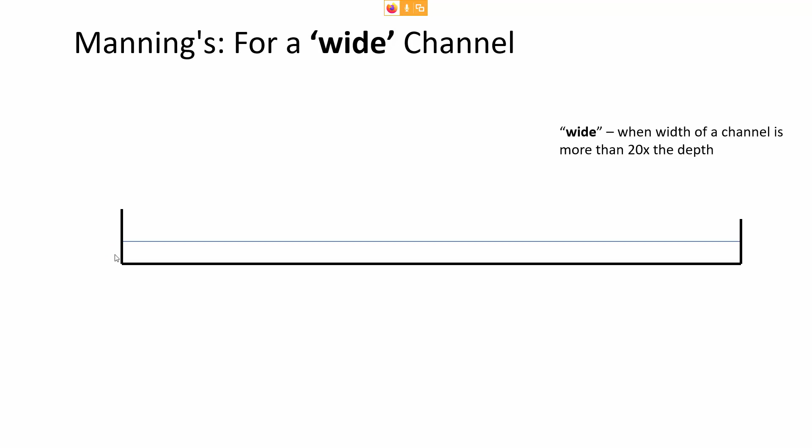What that allows us to do is, when there is a really wide channel, what's happening on the edges isn't quite so important. So for instance, if we had a trapezoidal side, and it's really wide like we're seeing here, the fact that it had just a little bit of extra flow on the sides of the trapezoid would be less important than if the channel wasn't wide. And so how that affects Manning's equation is that we can express it in terms of the flow per unit width.

Remember, lowercase q is the flow that's occurring divided by the width of the channel B. So it's really simple to find the flow depth using Manning's equation if you have a wide channel. It's just the flow per unit width times the roughness divided by the channel slope to the 1/2 power, and then all of that to the 3/5 power.

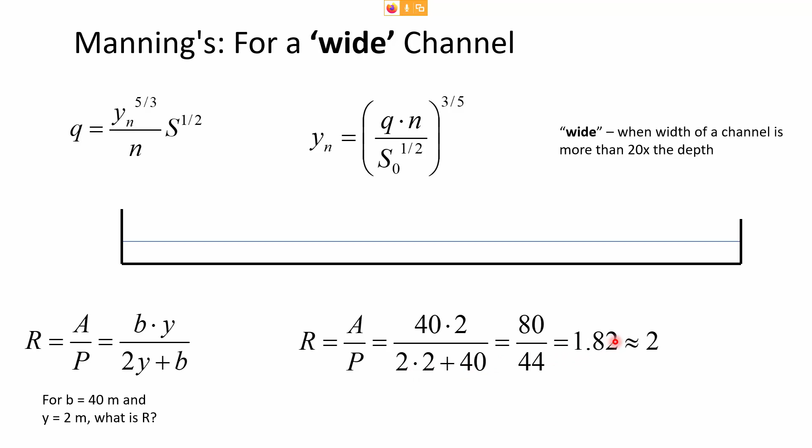So just as an illustration of why this is valid, let's say, for example, that we had some channel that was 40 meters wide and the depth was 2 meters. If you calculate the hydraulic radius for a channel that has a width of 40 meters and a depth of 2 meters, using the area and the wetted perimeter, you'd see that it comes out to about 1.82.

That's relatively close to 2, which is significant because what we're assuming in this wide channel simplification is that the hydraulic radius and the flow depth are approximately equal. Now, that's why we set the limit at it has to be at least 20 times wider than the depth, because when you get narrower than that ratio, it becomes less true that the hydraulic radius and the flow depth are equal.

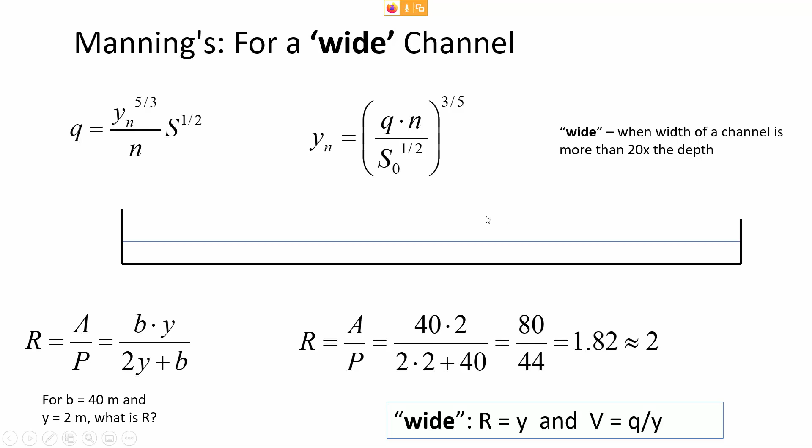But the error introduced by implying the wide channel width assumption is minimal as long as we keep the ratio to 20:1. So this is the modified Manning's equation for a wide channel, and similarly there's a modified equation we can use for the underflow gate equation.

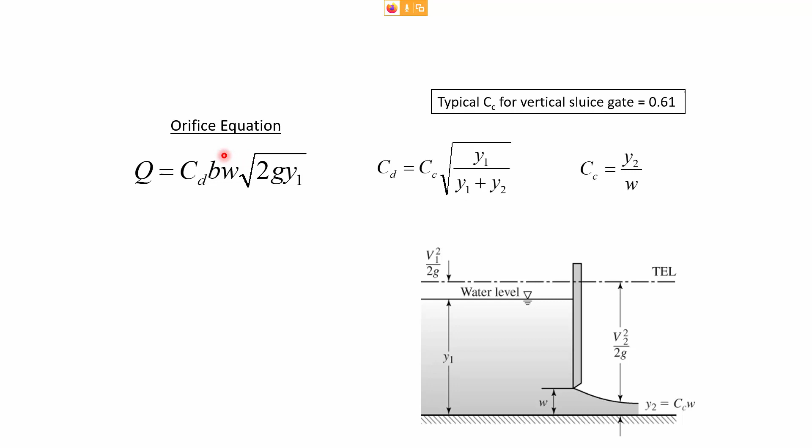Now this is the underflow gate equation we've looked at in previous class meetings. Remember the parameters that go into that are a discharge coefficient having to do with energy loss, how high the gate is open, the water depth upstream, and finally the width of the channel, B. So the wide gate can be calculated if you have a wide gate—again meaning the width of the channel is more than 20 times the depth of the opening.

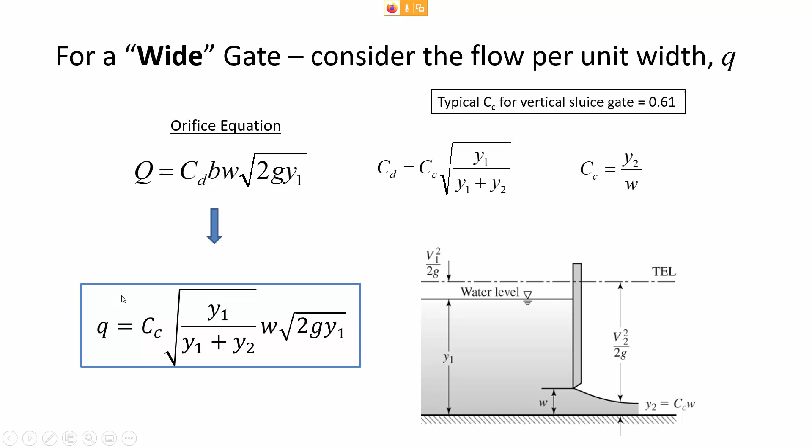We could find the flow per unit width using this function. So it's just a similar idea that sometimes the gate is very wide.

Now the bulk of what we're talking about today is gradually varied flow. RVF, rapidly varying flow, is what we were talking about with hydraulic jumps, and that's dramatic and pretty interesting, but it's far more common for us to have situations where the flow is gradually varying, rather than seeing big rapid increases in flow depth because of the transition between super and subcritical flow.

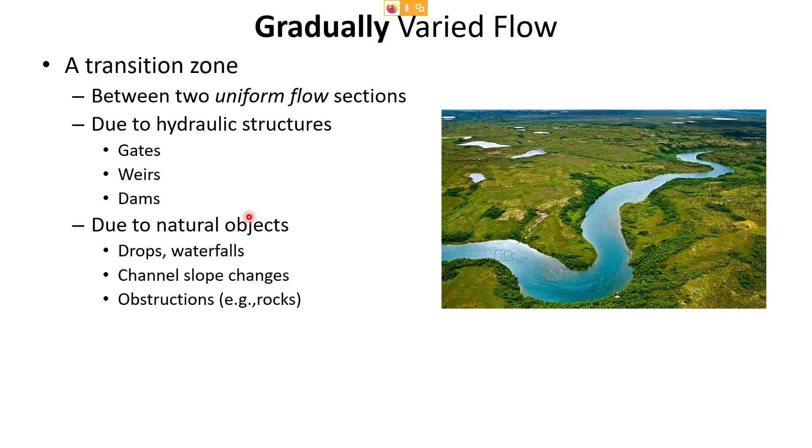There's all sorts of things that can cause it, like gates, weirs, dams, natural objects. Anytime we have non-uniform flow without a transition from super to subcritical, then we'll experience a gradual change.

So as the depth changes, so does the velocity. And when we do our gradually varying flow assumptions, the gradually varying flow equation, there's going to be a couple of assumptions we'll have to employ—the fact that the pressure is changing in a hydrostatic manner as we go down through the channel.

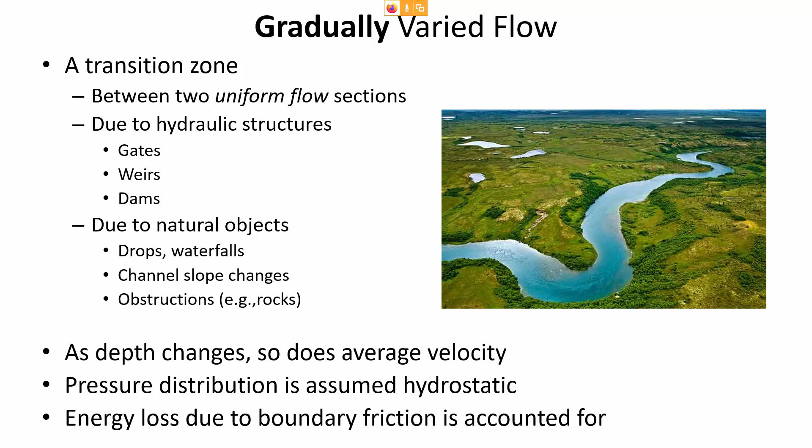Another thing is, well, let's look first at the causes for gradually varying flow, and then we'll talk more about the assumptions.

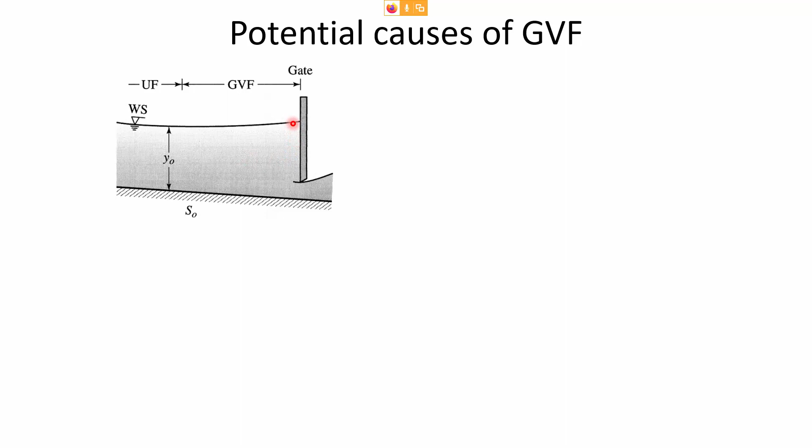Water that's approaching an underflow gate will gradually vary, and you can see the section where it's gradually varying here is as it gets closer to the gate—it's getting deeper because the gate has choked the flow. UF in this figure means uniform flow. So you'd calculate the depth with Manning's equation during the uniform flow section, but then this choked flow causes pooling upstream of the gate, gradually getting deeper the closer you get to the gate.

Another case would be water approaching an overflow. You'd have a section where the flow conditions are uniform, and you could use Manning's equation to predict the flow there, but then as the water flows over the edge, that draws down the depth. That's another instance of gradually varying flow.

Or if you have two different slopes, and the first slope wasn't steep enough to cause supercritical flow—here, S naught, the channel slope at section 1, is still a mild channel. It's not hydraulically steep, meaning it's not supercritical flow, because if we had supercritical flow, then the transition wouldn't be gradual—there would be a hydraulic jump. But here, two mild slopes together can cause gradually varying flow.

Or if you have a steep slope and water's coming out from a gate, but it's going to stay supercritical, it would gradually increase the flow depth until it reaches normal depth and we have uniform conditions, but the transition between the gate and the downstream uniform flow would be gradually varying.

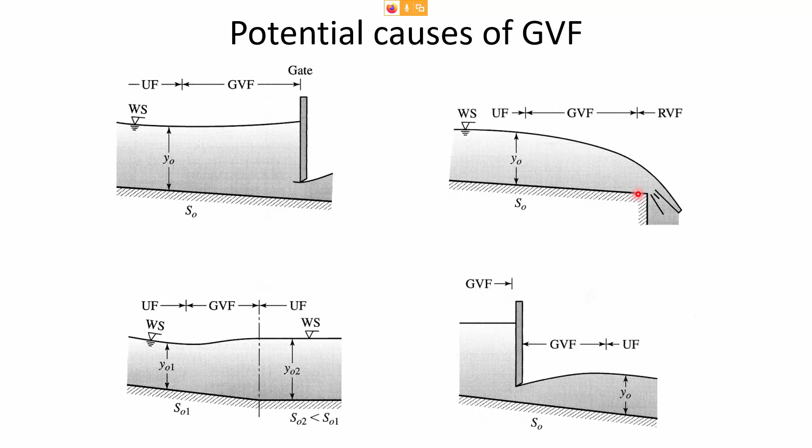So those are some hydraulic features that could cause gradually varying flow, and what we want to be able to do is predict the depth, because we can't use Manning's equation there. We have to have some method that allows us to start where we know the flow depth is uniform, and also have the other bound where we have a gate or overflow—some feature where we know its location and the depth at a fixed control point. What we're aiming to do is develop methods that will allow us to predict the flow depth everywhere else.

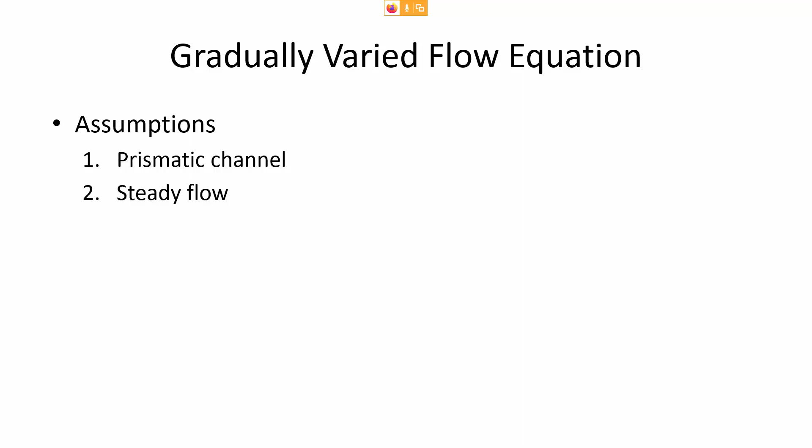So here's more about those assumptions. The methods I'm going to teach you, the two methods that will predict the depth of flow when it's gradually changing, hinge on the assumption that we're working with a prismatic channel. Early in the semester we talked about what that was - it just means that it's regular, and if you drew a center line down the middle of it, it would have a mirror image. Steady flow, of course, means that the flow rate isn't changing over time.

The gradually varied flow equation is applicable only when we have relatively small bed slopes. So we couldn't use it for water going down the spillway of a dam, but we can use it for any natural channel that we'll encounter.

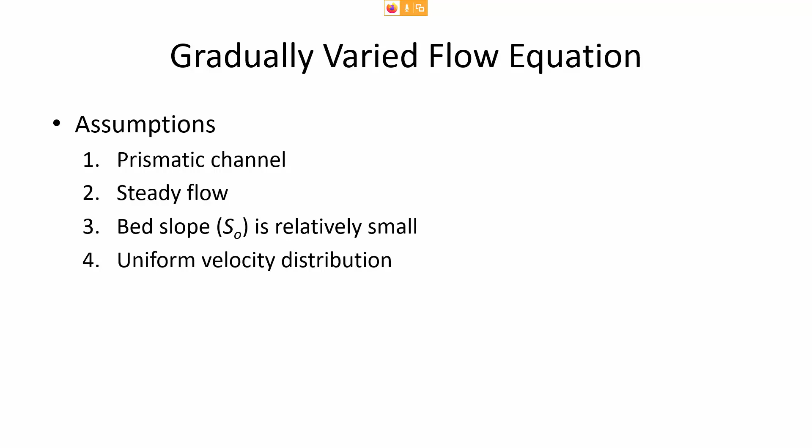It assumes uniform velocity distribution, and I've talked about this one before, how it's a little bit weak, where we assume that even at the bottom of the river the velocity is the same as at the top of the river. We had that same assumption when it came to the hydraulic jump equation, and I don't like it any more now than I did then, but it's kind of what we're limited to unless we want the math to get even more challenging, and you'll see it is with these assumptions.

We use a kinetic energy correction factor of 1, which is applicable for the bulk of the conditions unless we had laminar flow, and we rarely will in open channel. We assume a hydrostatic pressure distribution, and then finally we're going to be applying this assuming that between the two points, upstream and downstream location that we're trying to interpolate the depths with this method, the n value doesn't change between those two points.

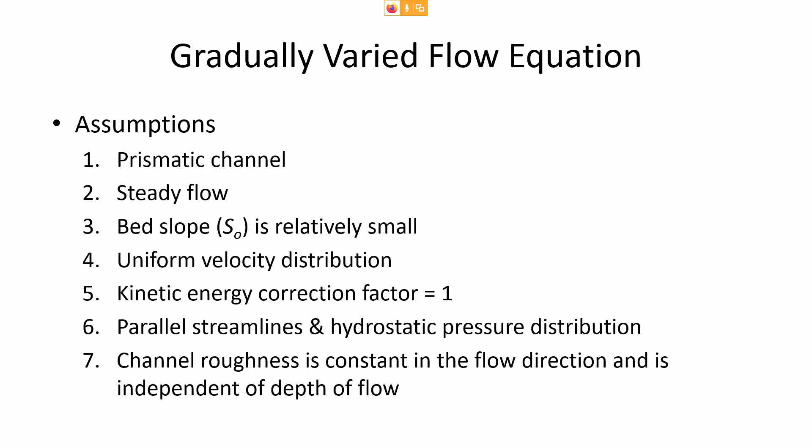So here's some theory that I hope will help you understand the methods that we're going to use. Let's say that the water depth is getting deeper. Take a look - we've got a pretty steep channel slope here, and upstream we have depth y. Downstream it's deeper, we've got y plus dy. So this is non-uniform flow, but there's no hydraulic jump in between upstream and downstream.

It didn't vary rapidly, it's a gradual variation in the flow depth. So this is gradually varying flow, and what we want to know is how can we predict the slope of the water surface, and how can we predict what the new depth downstream is going to be because of this. So if we look at the change in depth between upstream and downstream, we can start by looking at specific energy.

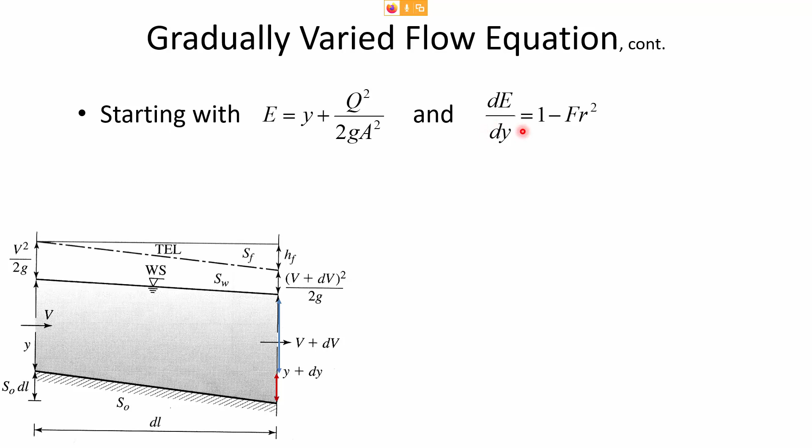Specific energy, remember, is the flow depth plus the velocity head. The change of specific energy with respect to the change in depth can be calculated by 1 minus the Froude number squared. We don't have enough time to go into the full derivation of that, but it's just an application of how specific energy is changing with a change in flow depth.

And the implication of it is that we can look at the three different slopes that are relevant here. The three different slopes are S sub f, which is the slope of the energy grade line, S naught, which is the slope of the bottom of the channel, and we want to know - we're trying to predict S sub w, the slope of the water surface - because if we know the water surface slope, that'll tell us if it's getting deeper or shallower downstream, and also what's the rate of change in the flow depth.

So we're going to substitute in - we're going to use the slope of the energy grade line for changes in energy with respect to length, and we'll use the channel bed slope as a substitute for how the datum is changing with respect to this incremental length between the two points.

The name of this equation that's just come up on screen, dy/dl, we call the rate of variation of depth of flow with respect to distance along the flow direction. You can see that's in quotes because what this is saying is basically the slope of the water surface at a particular point. So if it's positive, the water is getting deeper in the direction of flow. If it's negative, the water is getting shallower in the direction of flow, so the depth is decreasing.

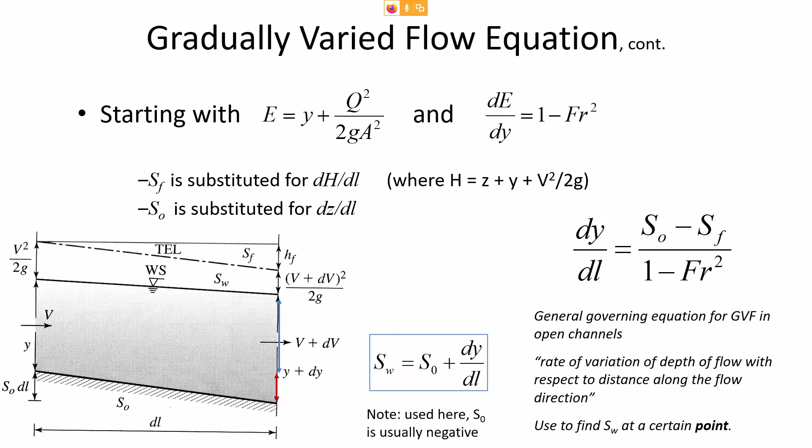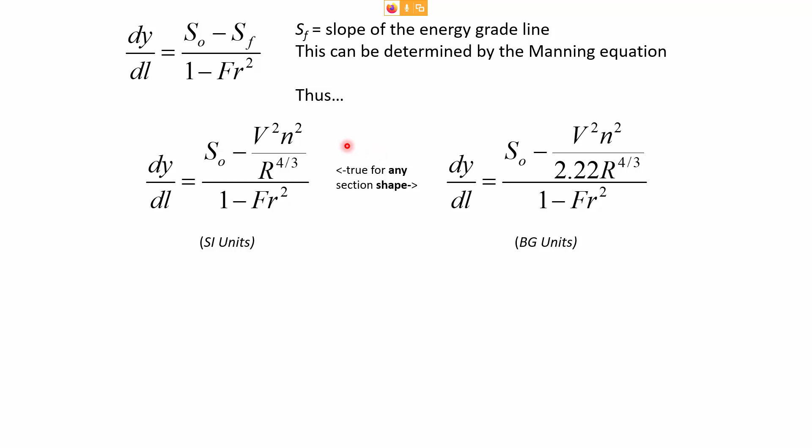Now these equations are true for any section shape—it could be a trapezoidal channel, a triangular, half circle, or rectangular. This is always true, but we even have a simpler equation if it's a wide section. So if the channel is hydraulically wide, meaning the width is 20 times greater than the depth—that's the threshold we'll use for applying this—then we can predict the slope of the water surface relative to the bottom of the channel.

We do this by knowing the channel bed slope and then the ratio of the normal depth to the flow depth at that location, and the critical depth to the flow depth at that location. So this will be a relatively simple equation for us to apply when the channel is wide.

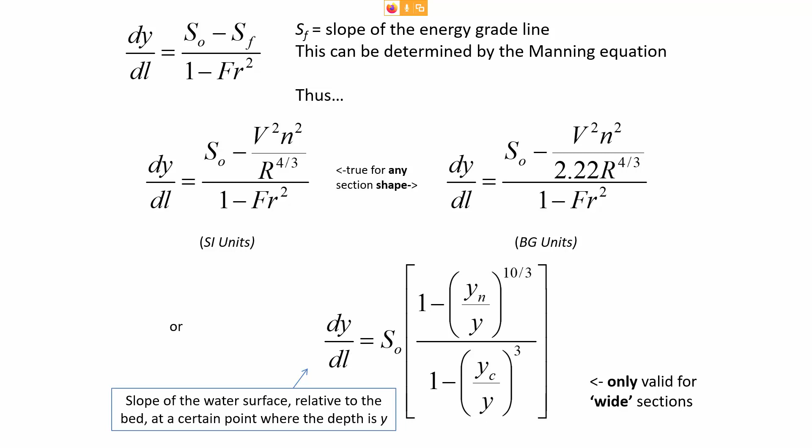It's got kind of a funny name. If you go through the textbook, in a couple of spots, this equation is referred to as the process equation. I think there was a reality TV star guy called the Process, maybe—I don't remember, I don't watch a lot of reality TV. But if we were going to give this equation its reality TV name, it would be called the process equation.

And if dy/dl is positive, that means the water depth is increasing, and if dy/dl is negative, that means the water depth is decreasing.

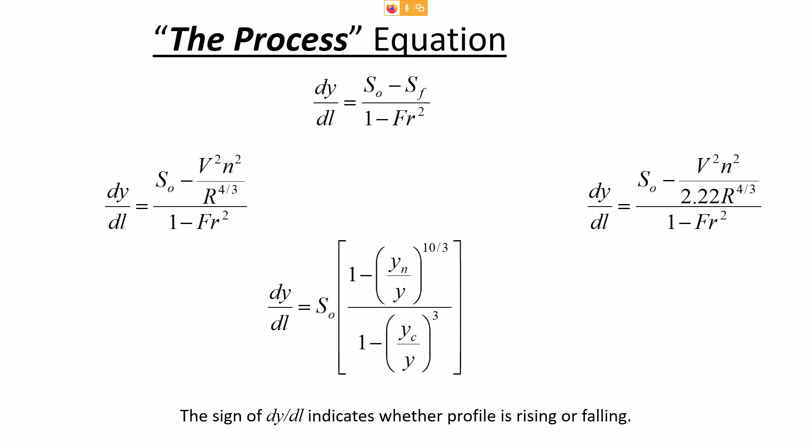So let's get a chance to practice this equation. We have a rectangular channel. We know the flow rate going through it is 20 cubic meters per second, and fortunately for us, this particular channel is hydraulically wide: 40 meters wide and 2 meters deep.

That means it's within this threshold of 20:1 width to depth, which means we can use the simpler equation for determining the process equation, and we can also use this simple equation for normal depth. So with the given bed slope and the known roughness value, let's first find out what is dy/dl at a particular location where the flow depth right now at this spot of interest is 2 meters.

Now just to clarify, the normal depth is not 2 meters. This is a certain spot where either there's pooling because of an obstruction or the flow is going over a drop-off and decreasing, but for whatever reason it's not flowing at its normal depth—it's flowing at some other depth.

So what we're going to do is first find the flow per unit width, lowercase q, then substitute that into the critical depth equation, find the normal depth, and substitute both of those into the process equation, along with the given bed slope. So find dy/dl at the location where the depth is 2 meters, and from its sign—positive or negative—that will tell us whether the depth is getting deeper or shallower in the direction of flow. Then finally, we can substitute the given slope and the process equation into this formula for S sub W.

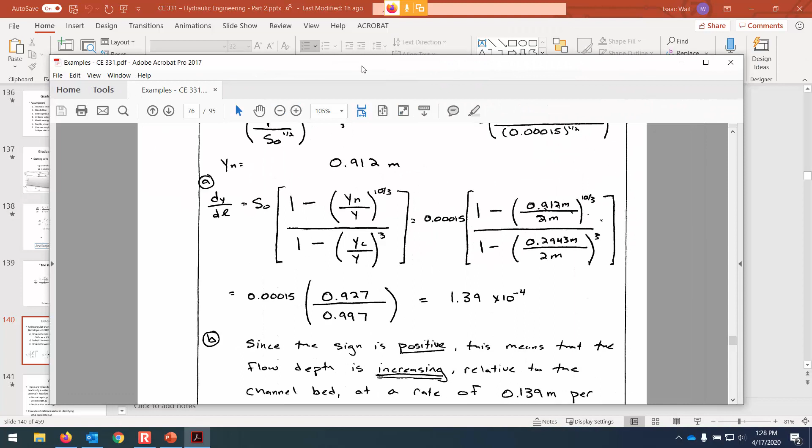Okay, let's take a look at those numbers so far. We started off with needing to calculate the flow per unit width. So if it's 20 cubic meters per second going through a channel that's 40 meters wide, then that gives us a flow per unit width of 0.5 meters squared per second.

And we can use that to calculate the critical depth. Remember, this critical depth equation only applies if a channel is rectangular. If the channel isn't rectangular, then we would need to determine the critical depth by setting the Froude number equal to 1 and then solving for y sub c in the area formula.

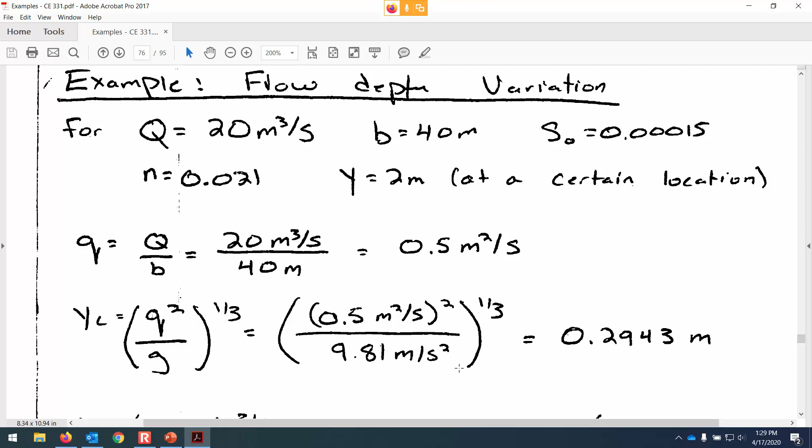So we have yc, and then we can use this normal depth equation, which again we have to keep in mind is only valid if the channel is not only rectangular, but also hydraulically wide. That's even more restrictive than the critical depth equation, because the critical depth equation is valid just as long as it's rectangular. This one can only be used if it's rectangular and hydraulically wide. It doesn't have to be rectangular, but hydraulically wide, which is effectively rectangular.

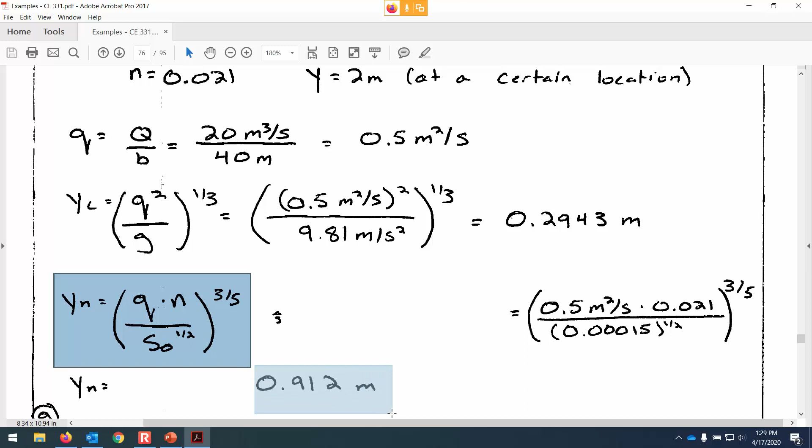Okay, so our normal depth is 0.912 meters. Now when we substitute all of that into the process equation...

I just remembered the name of that reality guy. His name is The Situation. So, anyways...

This is the process equation. So you substitute in the channel slope, the ratio of the normal depth to the flow depth at that location, the ratio of the critical depth to the flow depth at that location. The dy/dl is 1.39 times 10 to the minus fourth.

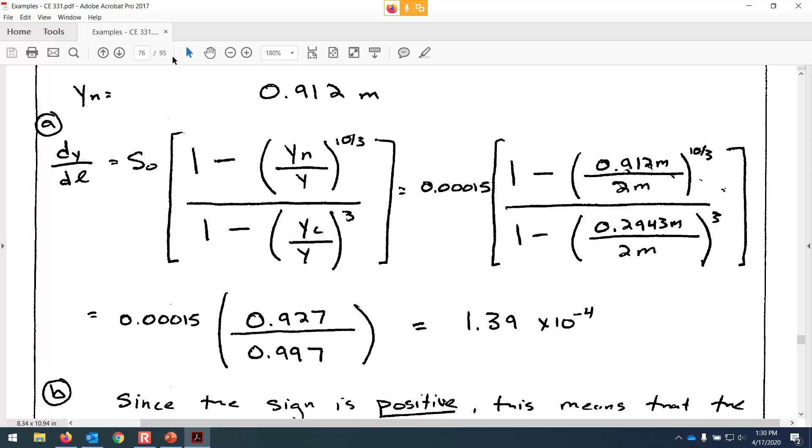Now since that's positive, that means it's getting deeper in the direction of flow. Any questions so far about the dy/dl calculation? Okay, so the interpretation of that being positive is that the flow depth is increasing in the direction of flow.

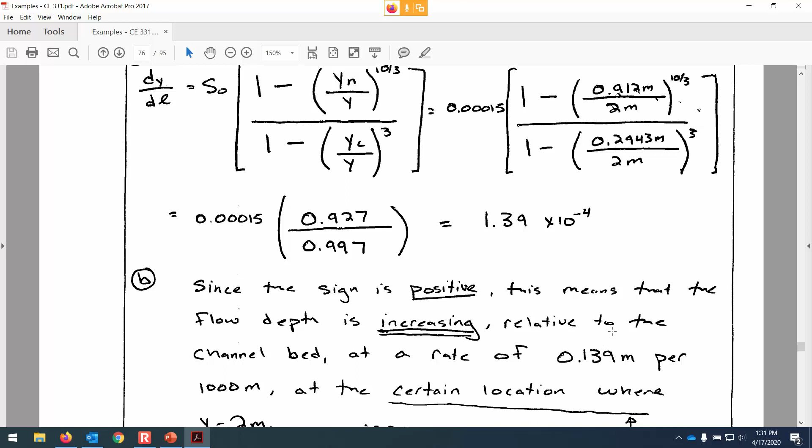Now this dy/dl though is just relative to the channel bed, so we're going to subtract out the slope of the channel in just a moment, but what I'm drawing here is a sketch of a location where we know the actual flow depth is 2 meters, the normal depth is less than that, and the critical depth is less than the normal depth.

So comparing the normal and the critical depth is one way for us to diagnose whether the conditions are supercritical or subcritical. Anytime the normal depth is greater than the critical depth, that tells you you've got a mild slope. In our case, this is a mild slope, and we have subcritical conditions because the flow depth is greater than the critical depth.

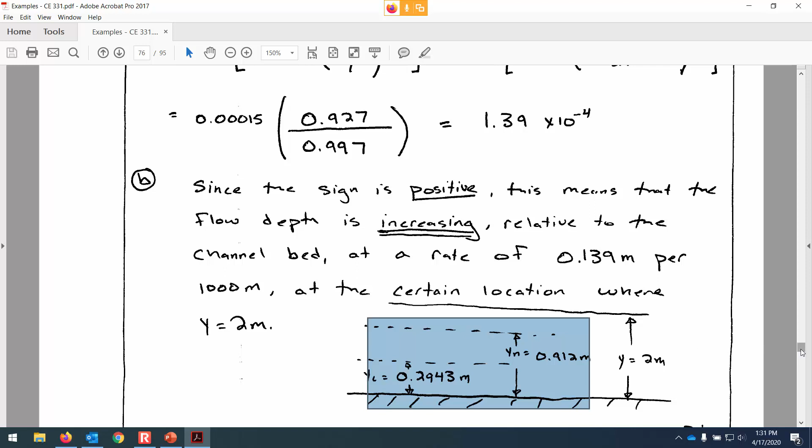All right, so for the water surface slope, we substitute in the channel slope in negative terms because the water is flowing downhill. We have to have an absolute understanding of what slopes are when we are doing this gradually varying flow analysis. So S0 is negative, but the dy/dl is positive, and the net difference between them is that the water surface slope is negative.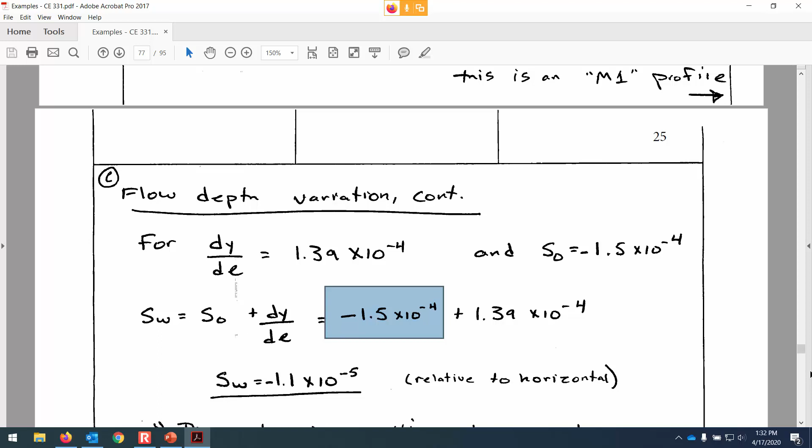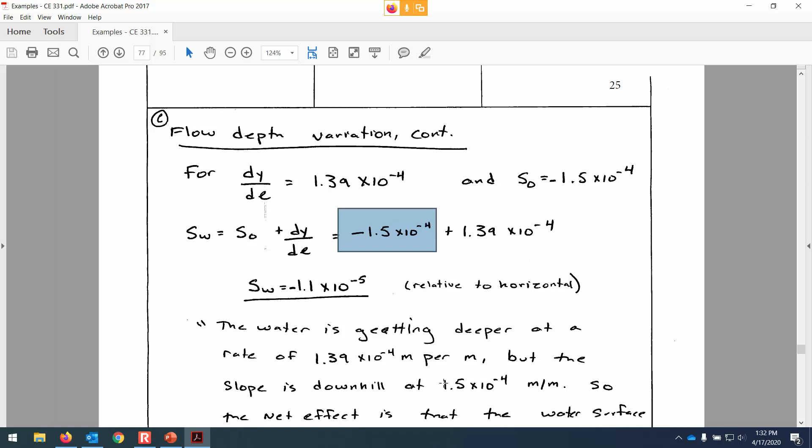1.1 times 10 to the minus fifth. So that means that relative to the horizontal, the water surface slope is decreasing. The water is getting deeper, but the slope is even steeper than that. And so the net effect is that it's flowing in the direction of flow - it wouldn't be flowing from left to right if it wasn't going downhill, and it is.

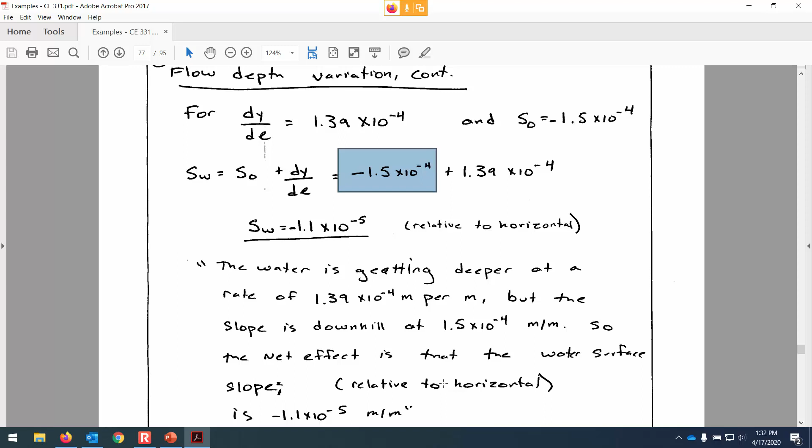Okay, so we used the new Manning's equation that you've learned for a wide channel. We substituted into the process equation, and the interpretation we were able to get from that is whether the flow depth was getting deeper or shallower in the direction of flow, and in this case it was getting deeper.

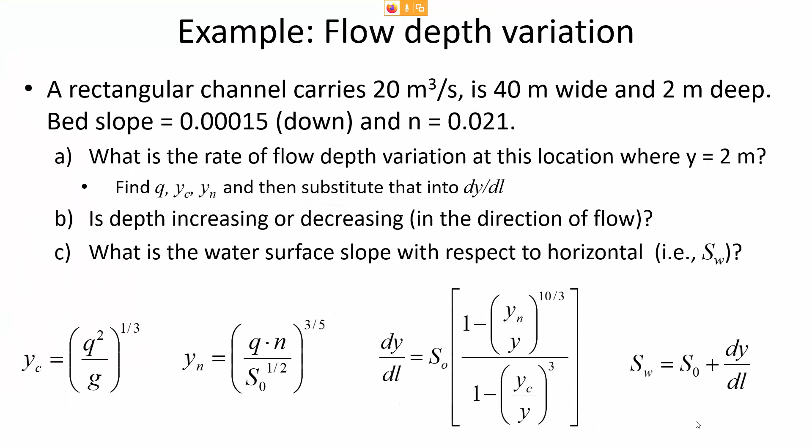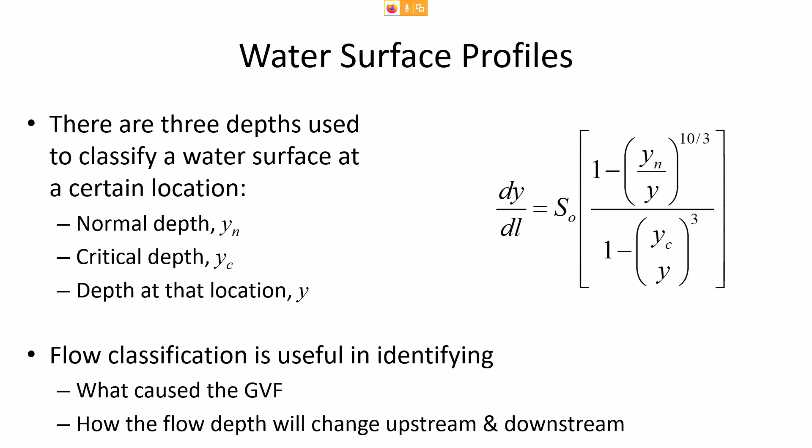Alright, so here's the process equation, and the three depths that we can use to classify water surface profiles are the normal depth, the critical depth, and the actual flow depth, just like in that sketch that I showed you from our example. We compare those three depths and then we can draw conclusions from them, and use those depths to classify what caused the gradually varying flow and how it might be changing in the direction of flow.

So, for instance, just looking at the slopes, there are different categories. If the slope is less than the critical slope, this is a mild channel, and you notice it's a mild channel because the normal depth is bigger than the critical depth - that's how you diagnose a mild channel. But you diagnose a steep channel if the critical depth is greater than the normal depth. And if the two are equal to each other, that's an indication of a critical slope.

Horizontal slope just means that it's flat, and there isn't a normal depth that can be calculated if the slope is flat. An adverse slope means that water is flowing uphill, and it can do that just for a little while - not for very long - but if you have enough velocity, water can flow uphill temporarily.

I've actually been on a water slide that goes uphill temporarily. It's pretty cool.

What we do to diagnose the flow regime in open channel flow is first start with comparing the normal depth and the critical depth, and that tells you if your water surface profile is M, S, or C, so the slope is given the abbreviation based on these cases.

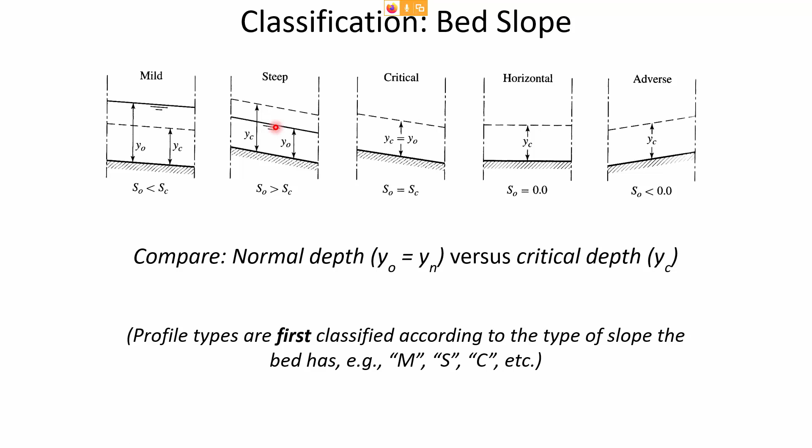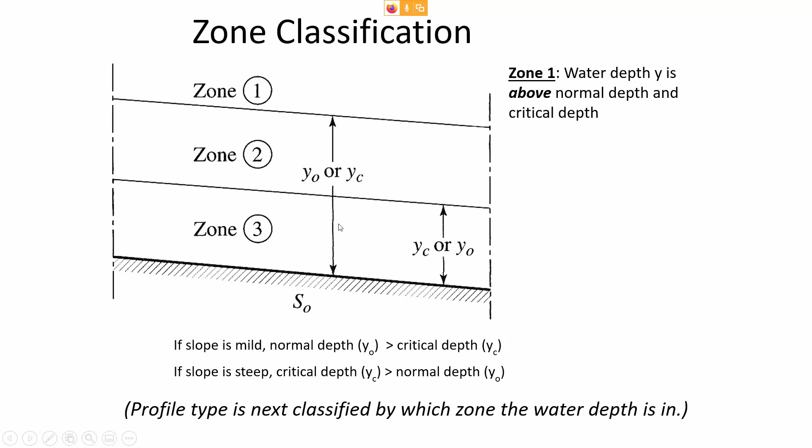Going back to the previous slide, the one on top is going to be the normal depth if it's a mild flow, and it's going to be the critical depth if the flow is steep. So the actual observed flow depth should be either above both of them, in between the two, or beneath both of them. Those are the three different zones.

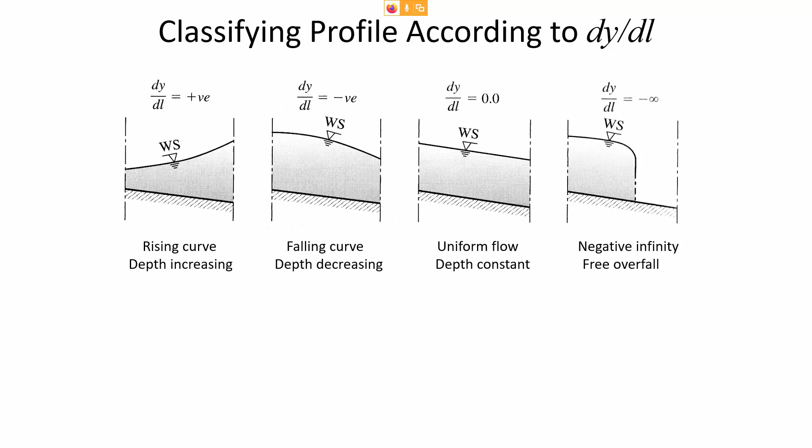Remember dy/dl: if it's positive, the flow depth is increasing; if it's negative, the flow depth is decreasing. The next thing we want to look at is whether it's mild versus steep, and whether you're in zone 1, 2, or 3, which will tell you how the flow depth is changing.

Let's look at a mild slope for instance. If you have a mild slope and the water depth is in zone 1, that means it's getting deeper in the direction of flow. So this sketch shows that with an M1 profile, the water depth is increasing in the direction of flow. But if you have an M2 profile, that means you've got a mild slope, but for whatever reason the flow depth is getting shallower downstream.

That could occur if the water is flowing over an edge—that's what could cause the drawdown. An M3 profile would be that you have a mild slope, but for some reason the flow depth is less than the critical depth. Something that would cause that is flow from an underflow gate. When it's about to go into a hydraulic jump, we still have gradually varying flow until it goes through the hydraulic jump.

The same thing can be done with steep profiles. We know that in every case, if the water depth is in zone 1, it's going to be getting deeper in the direction of flow, and we can look at the different zones to predict how the water depth is changing in the direction of flow.

Your textbook has sketches similar to these for critical, horizontal, and even adverse slopes. There aren't adverse zone 1 or horizontal zone 1 cases because we don't have a normal depth, so the zones are distinguished only by the critical depth. If the flow isn't going downhill, you can't calculate a normal depth for that.

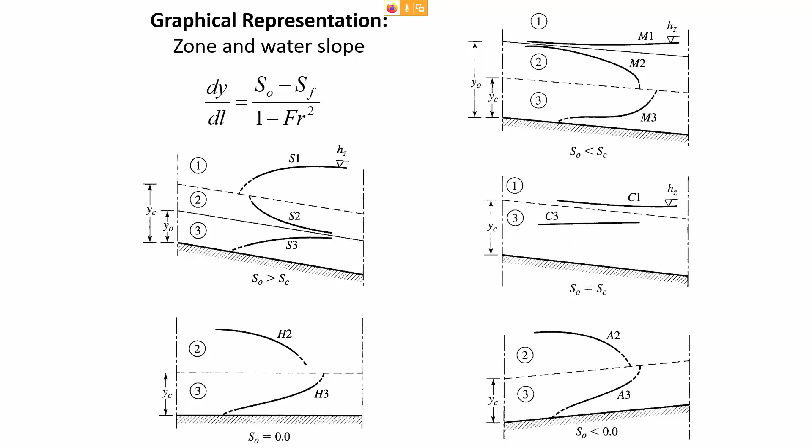Here are some more sketches showing the hydraulic features that can cause M1, M2, and M3 profiles. You can see the M1 is water pooling as it approaches some obstacle—that's what would cause an M1 profile. An M2 profile is caused by flow over the edge, and an M3 profile is caused by supercritical flow.

Likewise, if you have a steep slope, there are different hydraulic features that would induce flow in the 1, 2, or 3 zones.

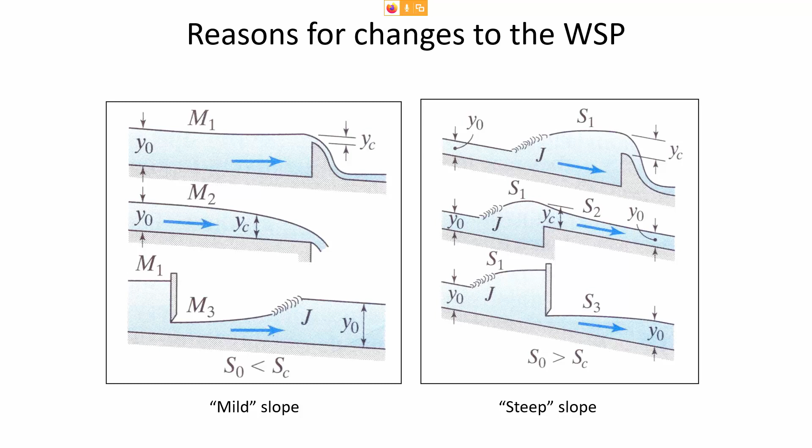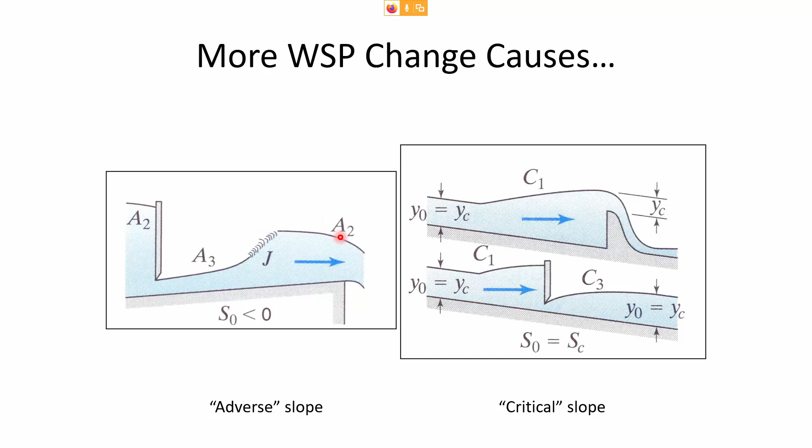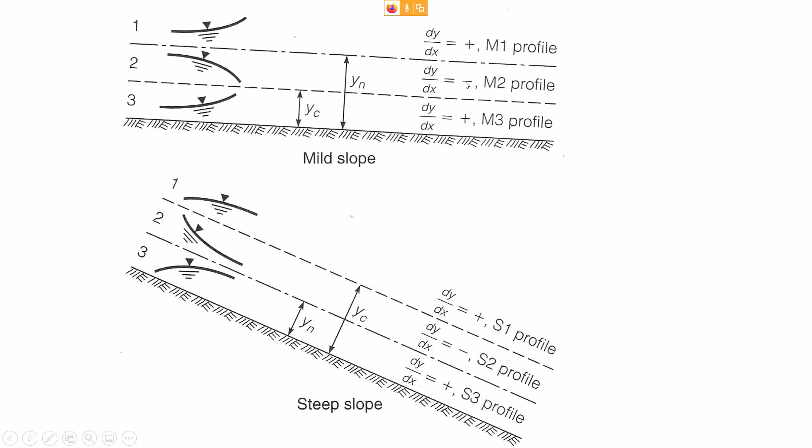And here's another textbook's way to summarize and make it clear how you diagnose the flow regime, whether you have mild or steep conditions, and which zone you're in. The effect of that is whether the water depth is increasing or decreasing in the direction of flow.

So let's go through this example and try to calculate how the flow is changing. We know the channel width is 8.5 meters, and the given depth at this location of interest is 3.2 meters. The normal depth will be different from that, and we also need to calculate the critical depth because we're going to compare the critical and normal depth to find out whether we have a mild or steep slope.

Then we're going to compare this given depth to find out whether we're in zone 1, 2, or 3, and classify the water surface profile. Use the equation for critical flow to find the critical depth with the flow per unit width. This isn't hydraulically wide, so to speed things up, I'll tell you the normal depth. Let me pull that up.

Okay, so calculate the critical depth right now, and I'll tell you that the normal depth is 2.7 meters. When someone has the critical depth, please type it into the chat tool or enable your microphone and tell us what the critical depth is here.

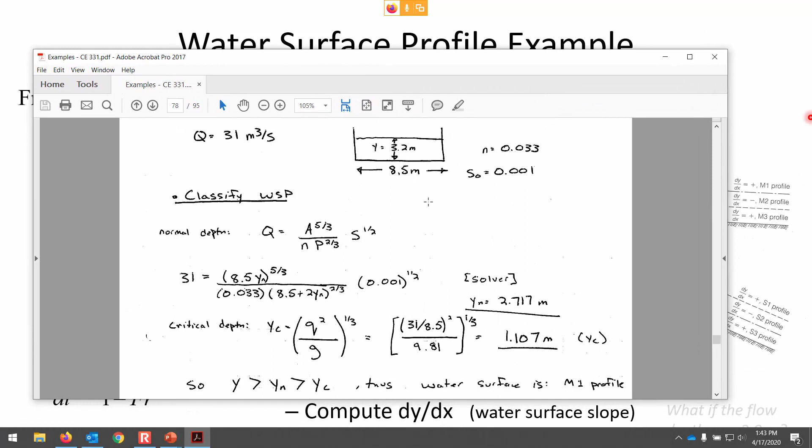If I bring the solution up on screen, you can see I calculated the normal depth using Manning's equation without the abbreviated version, since this isn't a wide channel. We got the normal depth and the critical depth, and since the flow depth of 3.2 meters is greater than either of those, that's what makes it an M1 profile. That's how you diagnose the water surface profile.

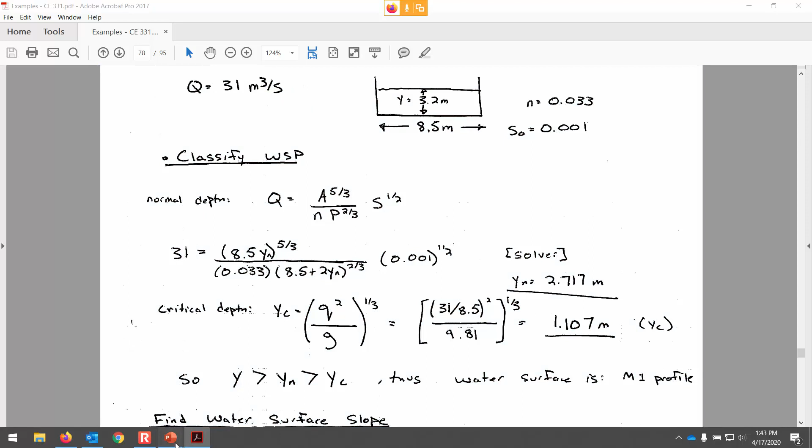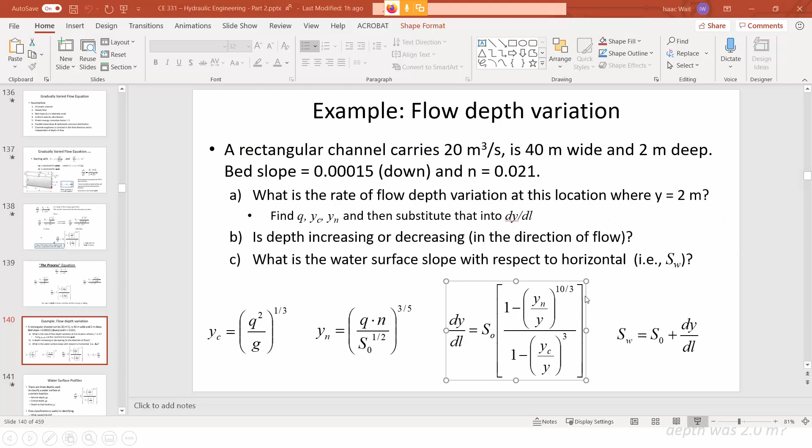Now the second part of this: find the water surface slope. We can find S sub F, the slope of the energy grade line, by rearranging Manning's equation and putting in the N value, flow rate, width of the channel, flow depth, and all the parameters for this channel. That tells us the slope of the energy grade line, S sub F, is 0.000634. S naught is given directly, and we subtract S sub F from it.

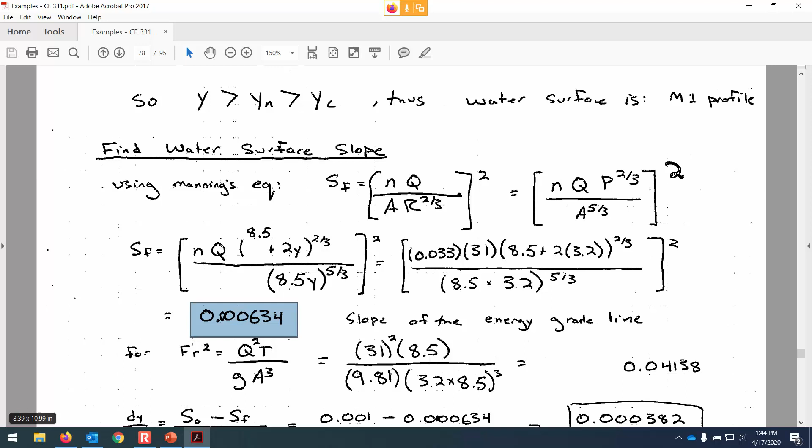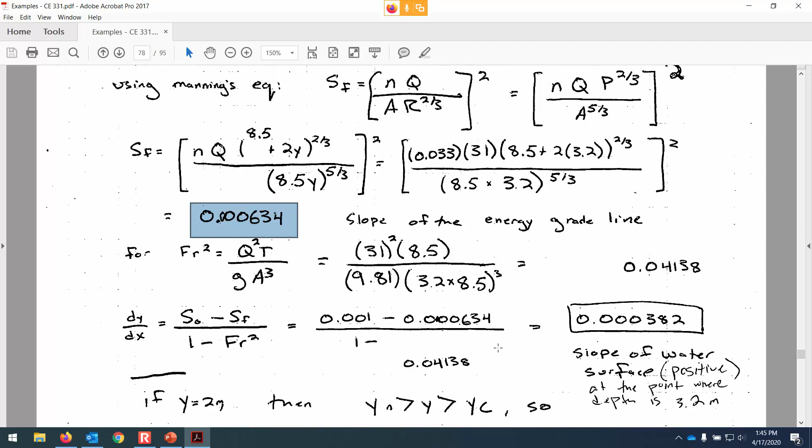We also need the Froude number squared because it's in the denominator of this equation. So the slope of the water surface is 0.000382, meaning it's getting deeper in the direction of flow, which is consistent with what we know about an M1 profile.

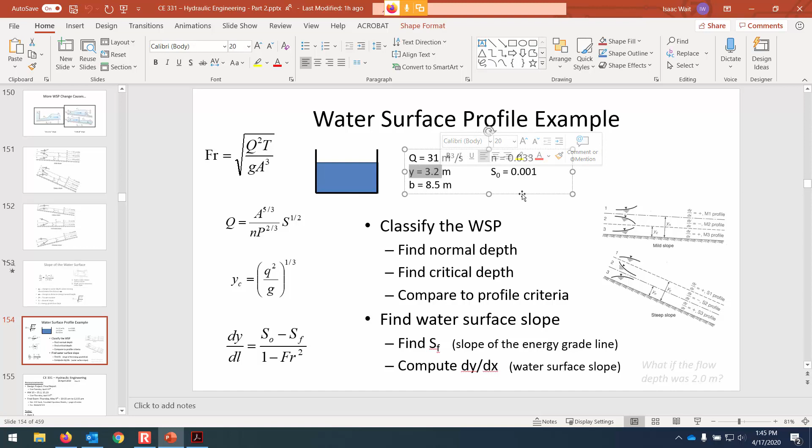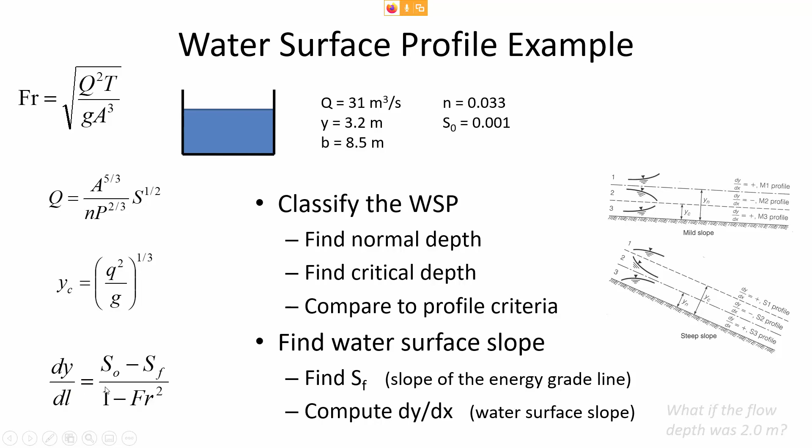Earlier we calculated this is an M1 profile just by comparing the flow depth to the normal and critical depths. An M1 profile, as the sketch off to the side shows, should be getting deeper in the direction of flow. When we calculated dy/dx, that tells us the rate it's getting deeper, which is 0.000382.

So that's the change of depth. dy/dx just tells you how much deeper it's getting in the direction of flow. So for every 1 meter horizontal, it's getting deeper by about 0.3 millimeters of additional depth for each meter of flow direction in the horizontal distance.

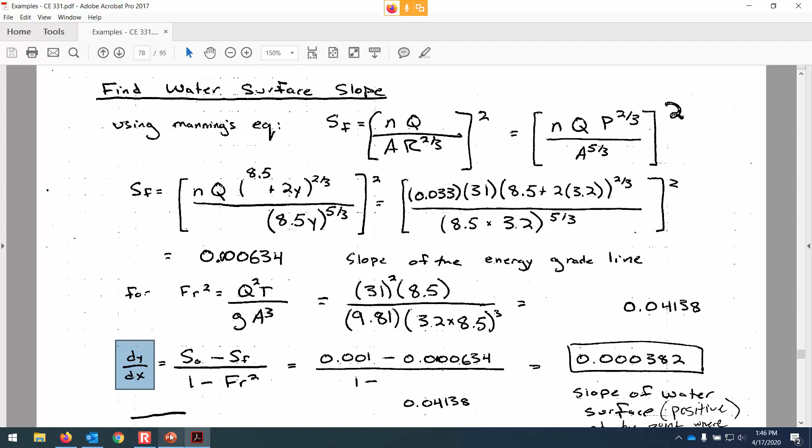All right, so that's how we calculated the slope of the water surface.